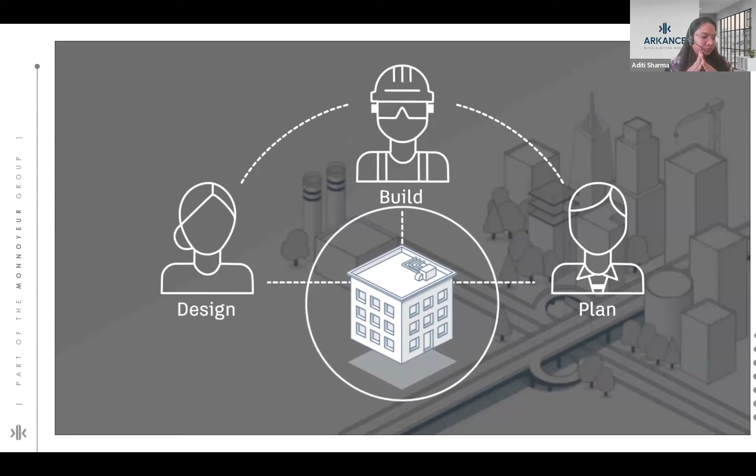What would the value to your project be if every person who works on a job has confidence that they are working with the latest information? No matter what they do or where they work, it would mean less rework, lower costs, and improved schedule timing. This is what Autodesk Docs...

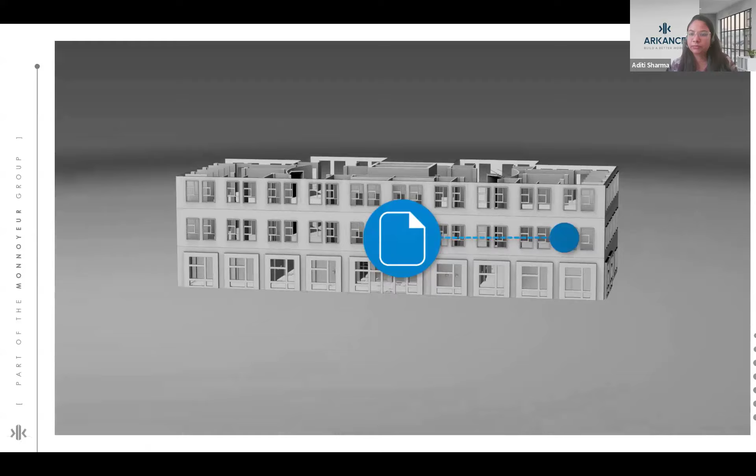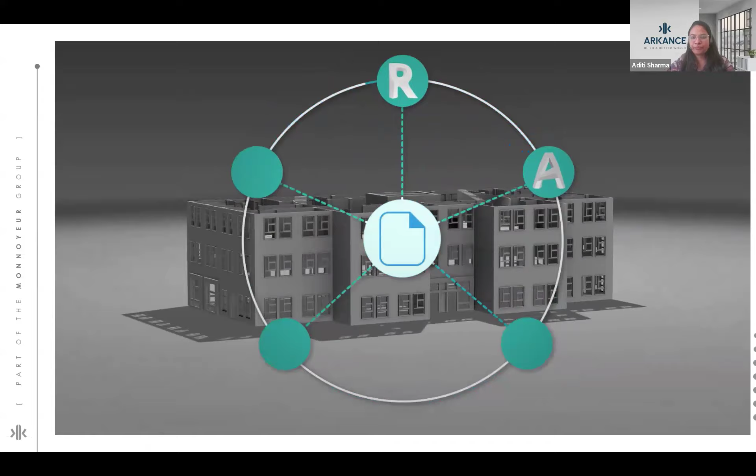is built to deliver: the ability for every team member to trust their data from design through construction. A common data environment shared by design, quantification, coordination, project management, and field collaboration keeps all project data in one place. Native integrations with design software get information published fast and in the desired format, meaning no critical project info is lost in the gap between incompatible solutions. You can keep the right information in the right hands with powerful document and version control.

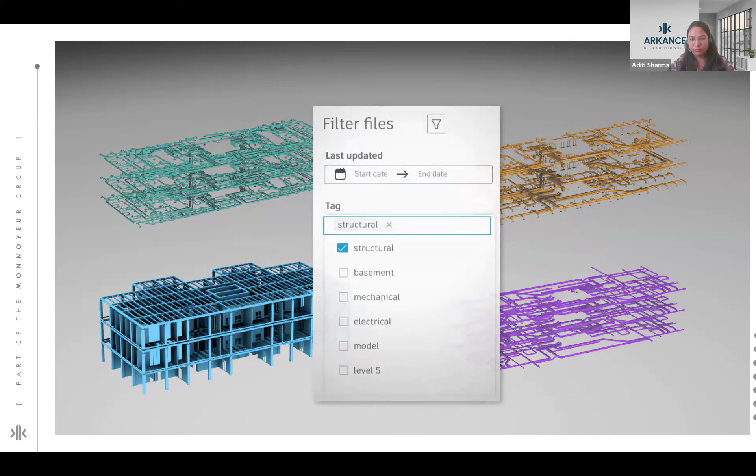Customized folder structures and comprehensive permissioning keep information organized, and advanced search makes it easy to find what you need in the office or on the job site. More advanced control is delivered through document review processes, making sure you only make information available when it's ready. Transmittals help you keep track of who's received what and when. Add in powerful markup tools and the ability to track and collaborate on issues across the lifecycle, and you've got real collaboration and coordination.

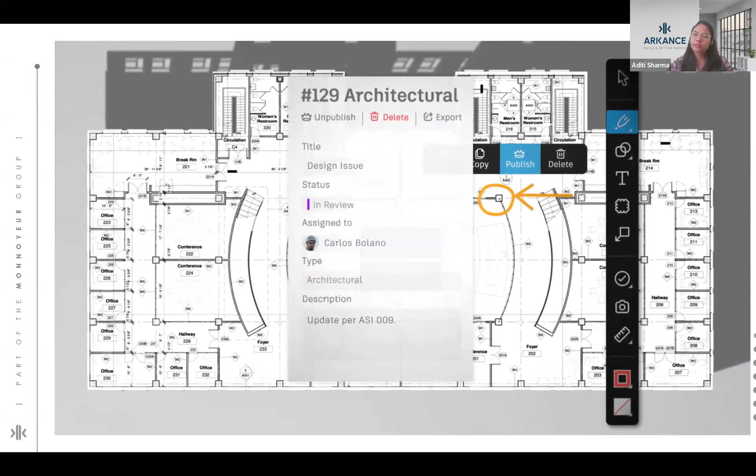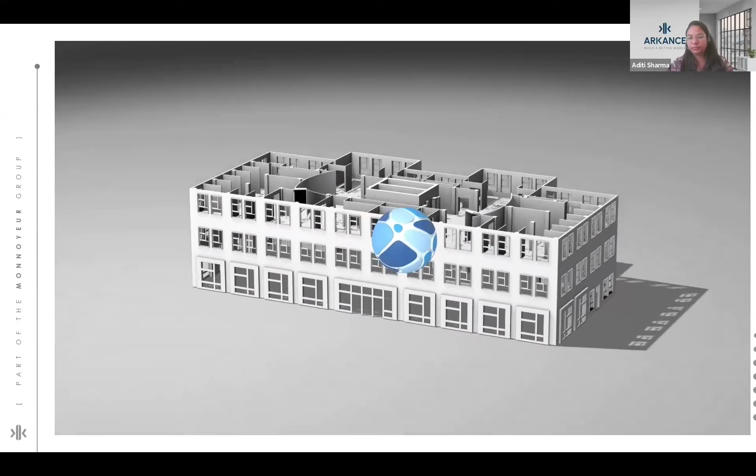One-click access to drawings, models, and even Microsoft Office files brings the power of collaboration to the whole team. Access to all data, simple viewing and collaboration tools, all without leaving the platform. With Autodesk Docs at the heart of the unified Autodesk Construction Cloud, teams can trust the data they rely on, anywhere, anytime.

I hope that was informative, just to brief you on the product, what exactly Autodesk Docs is, all the features it contains, and what problems it solves. So I'll take it up one by one.

But within these processes, because there is a high chance of iterations happening at each stage on a day-to-day basis, even more than once a day, there is a high chance of losing data and information within those files with this traditional way of working.

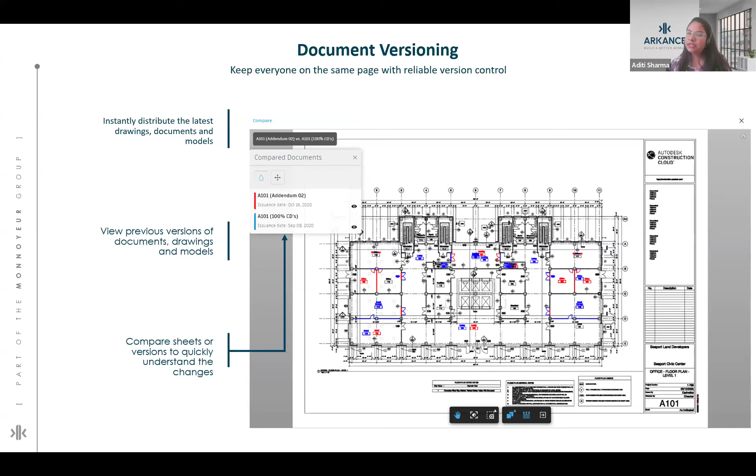Document approval happens when we are almost done with our design or drawing on a particular drawing, and I want it to go through an approval process.

It has two stages. We can set up what stages my document or drawing should go through. For electrical, I can have a different set of approval processes. For landscape drawings and details, I can have a different set of approvals, because the people, consultants, draftsmen, and teams are different. So we can create workflows, and then create reviews out of those workflows.

Okay, so now I'll stop sharing from here and go to my platform screen. I hope that I created a clear picture for you all to understand and absorb whatever I'll show you on the platform, because it was necessary to give you an idea about how things go, what the terminologies are, how we go about a process within the platform, and what different things we should consider.

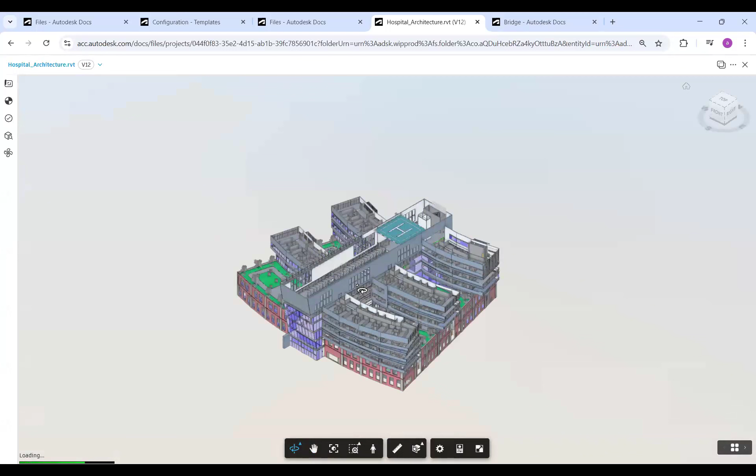Maybe I'll go to Docs and open this file. I'm opening this file to show you how to create markup and how to communicate over any model or any file.

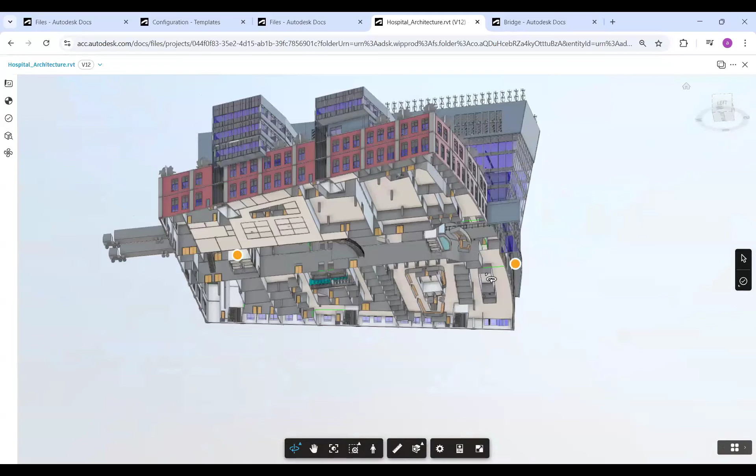Right now, as you can see, I am not opening Revit, but this is a Revit model uploaded to this platform, and I can see it. I can rotate it, I can go into the model for details, and also view it with details and everything. I can also place a first person here and view it.

Okay, so how to place an issue? For example, I want to create an issue with these windows or anything like that. I'll say design, maybe building code, and I'll put it here.

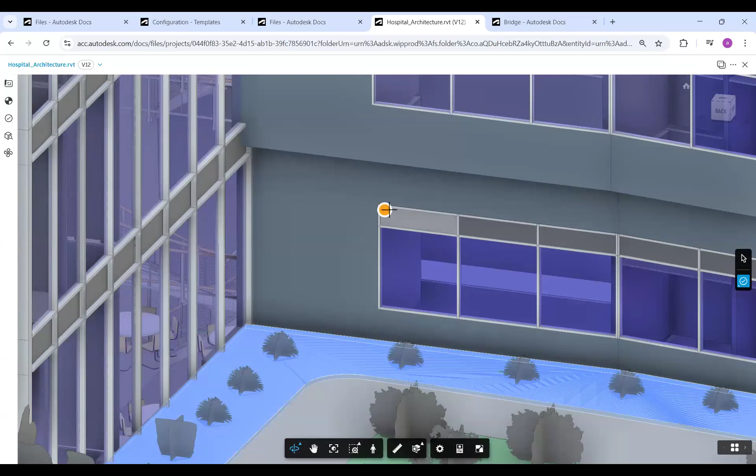I just clicked on the place where I want to create the issue, and now this is issue number 29. This is a thumbnail which shows us the status is open. Description, I can say problem with the frame. Assigned to, this is very important - whom do I assign this issue to? Maybe Darshan.

Then location - right now there's no location showing here because we haven't created any location in the template or while creating the project. While creating a project, we can create locations like ground floor, first floor, ground plus two, or the different spaces, lawn spaces on ground one or two, or like that.

Now due date, I can give a due date to this as Monday. Start date is today itself. If I want to attach something, I can attach, for example, I want to give him a reference. I can drop down anything from here, like my desktop or the platform. Whatever I want to put here should be on the platform ideally.

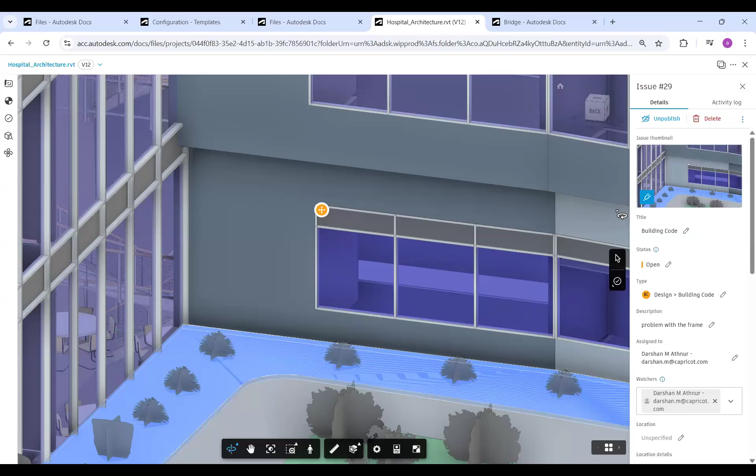Now comments - refer to the codes. Now submit. The moment I submit this, the issue is created, and the other person whom I assigned it to will get a notification and can see this: okay, this is the issue created by Aditi, and I need to solve this issue by this date.

Okay, so now versions as well. I can show you that we have 12 versions of the same file, and these are the versions which are being uploaded by, for example, Aditi and Darshan, on the dates - you can see the dates as well.

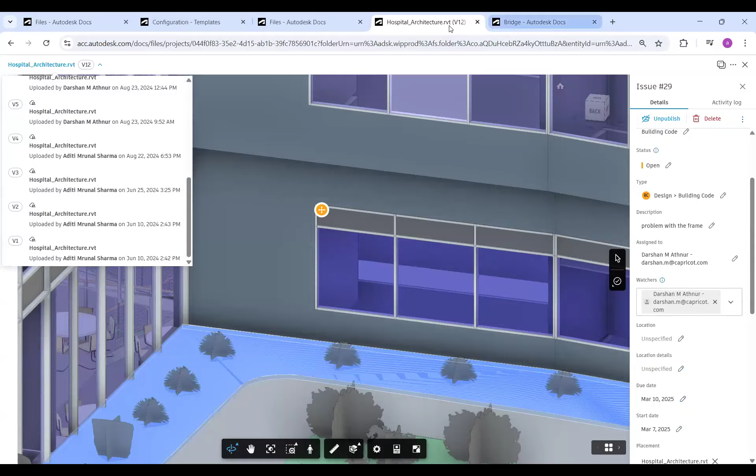Now I'm moving on to a feature called bridge. This is the part where I want to tell you about the automation part - what exactly gets automated here. There are so many things. If you utilize templates properly, then there's so many things which can be automated, like creation of project, addition of members, creation of folders - anything that can be automated with the help of a template.

But if we talk about bridge, what exactly we're talking about is, for example, I have two different projects, and I want something to remain in sync between those two projects, or maybe I want to update the other project as well with the same folder and files. How do I do that? How do I bridge those two projects together?

As you can see, within docs you have a feature called bridge. If I say bridge project and bridge to a project, if I go here in this option, this will send an invitation to this email ID to bridge a project with my project. So this is how this works. If I want to bridge this project, which is 2025 coordination, with any other project, from here I can select - here you can see we have two options.